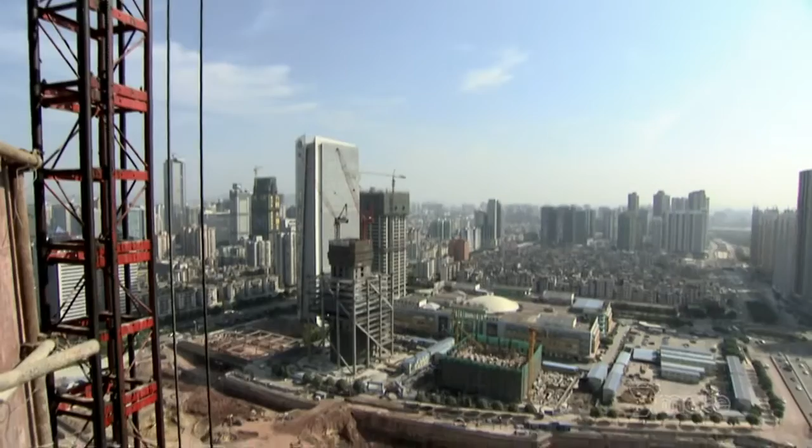Dozens of buildings are going up in Guangzhou's new central business district, but none like the Pearl River Tower. When complete, it will stand 71 stories high, among the world's tallest buildings. It will use 60% less energy than a normal building its size, and it will harvest sun and wind to make energy of its own.

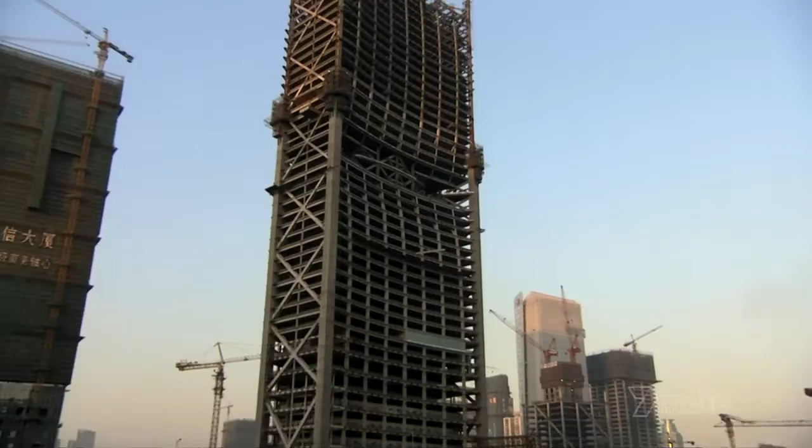Nature is both ally and enemy here. Typhoons pound southern China each summer like clockwork. A major fault line for earthquakes runs near Guangzhou itself. Engineers have to erect a building that not only harnesses the forces of nature, but withstands them. Right now, 1,000 men are racing to keep construction on schedule.

Across the site, Chief Engineer Dr. Cui Xiaoxiang is turning a radical blueprint into a concrete reality. My pressure is enormous. Frankly, my hair turned white after I came here. My biggest worries in the job are about safety and quality.

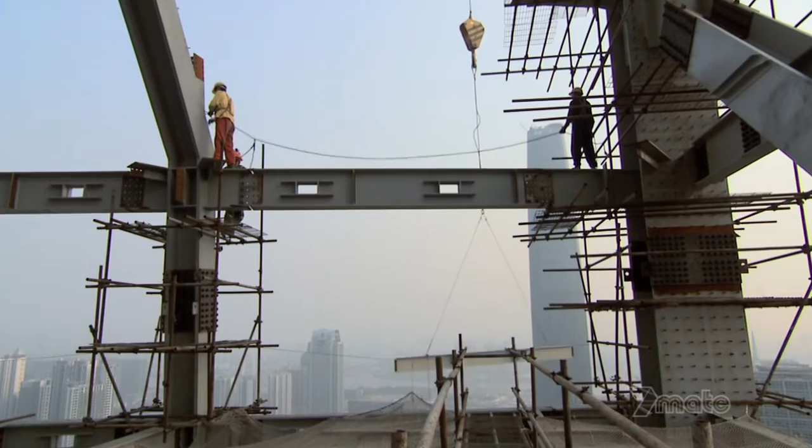On floor 45, they're installing 8-ton steel beams. They assemble the entire building using thousands of high-strength nuts and bolts instead of welds, the better to withstand earthquakes. The problem that comes with using only nuts and bolts is that we have to ensure high precision. With welding joints, you still have room for compensation. But when we use only nuts and bolts, we need to contain the deviation within a few millimeters. Otherwise, the whole steel structure will have huge errors.

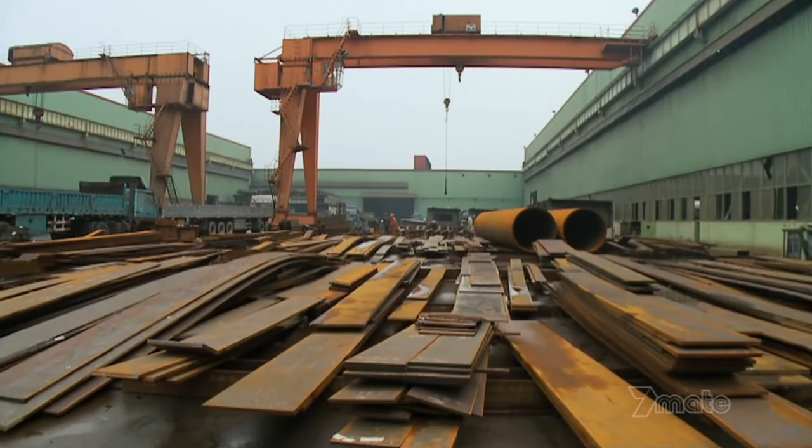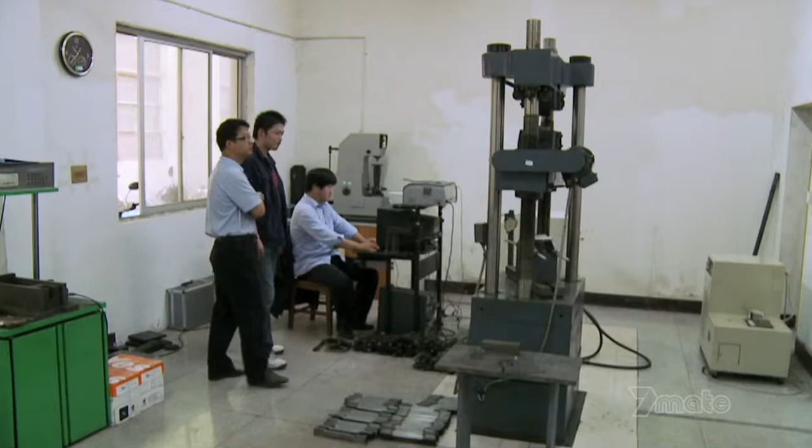Precision installation on site is mirrored by precision manufacture here, the Huning Steel Factory in Jiangsu province. The factory will produce over 18,000 steel pieces that make up the Pearl River Tower. Over 2 years, this factory will manufacture 29,000 tons of steel, enough to build almost 3 Eiffel Towers. Before they mass produce the parts, they stress each prototype to breaking point. A computer records the force applied and the relative strength of the steel.

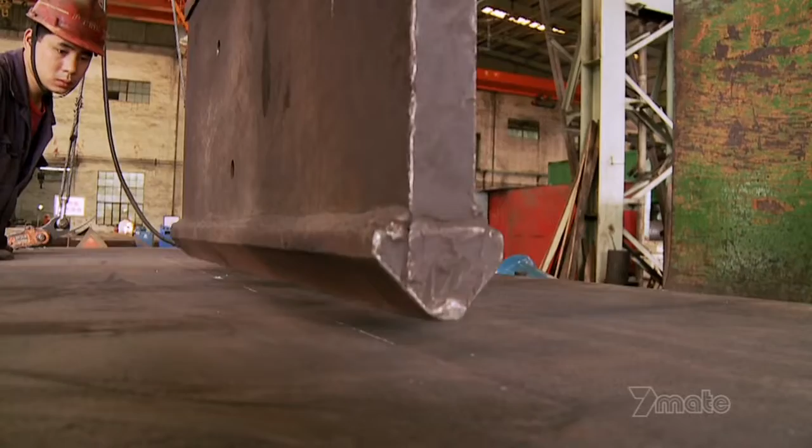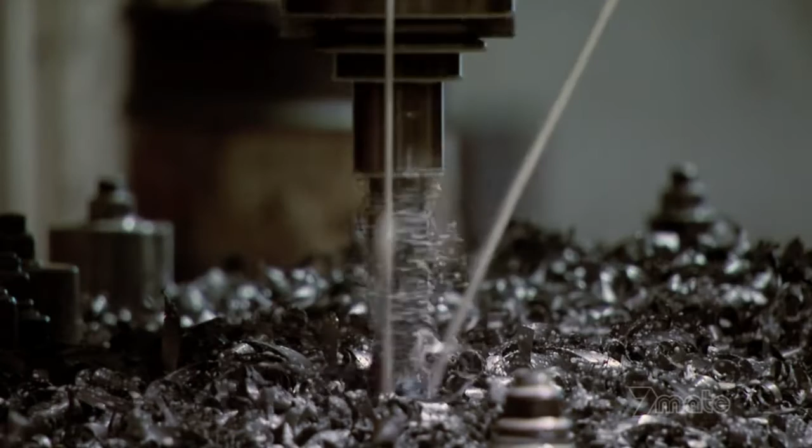All the steel must be perfectly flattened before they can start making components. They curve large beams by applying precise amounts of pressure at specific points along the length of the beam. They check every weld for defects using ultrasound. In total, they will drill 820,000 bolt holes to complete the structure of this tower. This machine can drill holes in 5 connection plates simultaneously, while maintaining accuracy in every plate. Some of the faceplates have more than 650 separate bolt holes.

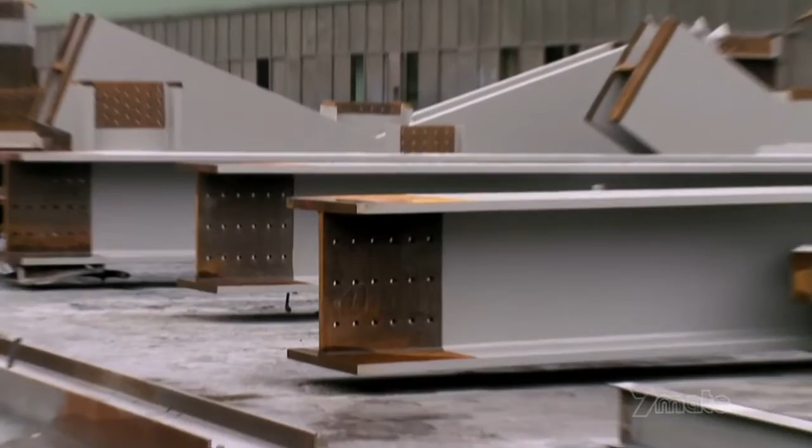The factory prefabricates key structures for the tower to avoid setbacks on site. Because pre-assembly can reveal the quality and precision of each part. If everything matches, then we ship to site. If not, we correct the errors at the factory to make sure everything goes smoothly on site.

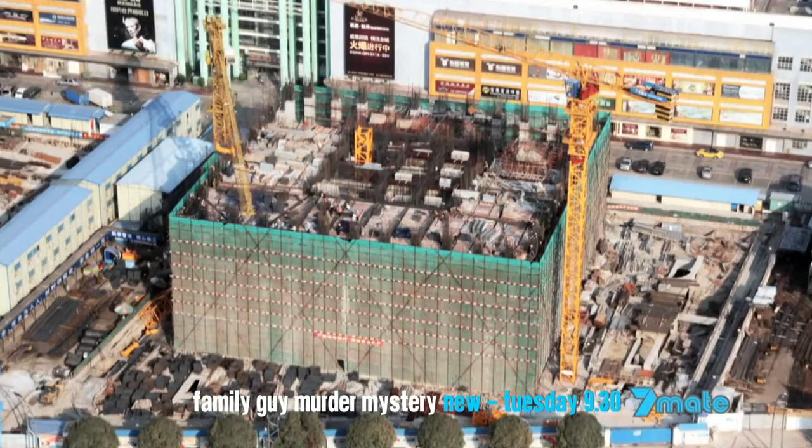Today, the words construction and China go hand in hand. Each year, the nation adds 2 billion square meters of construction, half of the world's new buildings. But this client wants a building that stands out from the rest. In summer 2005, they issue a competition brief to the world's leading architecture firms. Architect Adrian Smith has created such icons as the Jinmao Tower in Shanghai, once the tallest building in China, and the Burj Khalifa in Dubai, now the tallest building in the world. So what do you do for an encore?

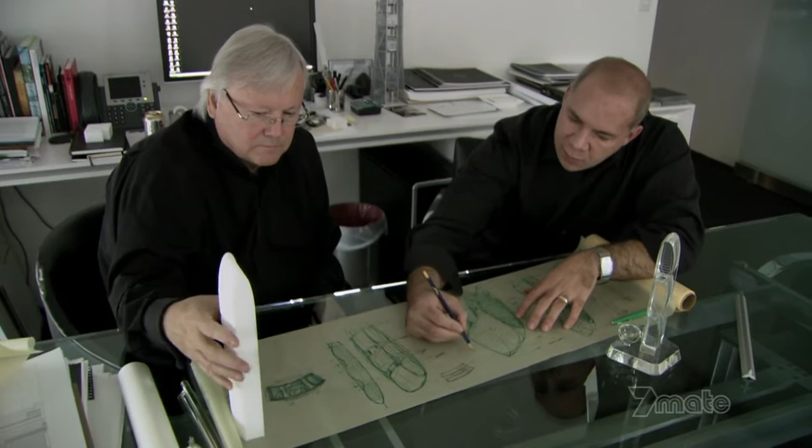When I first started reading the brief, and they talked about a building for the future, and they talked about a building that harmonizes with the environment, I thought that here is a client who we could propose a zero-energy building to. A super tall building that produces as much energy as it consumes. No one's ever built such a building. It's a radical design, based on a concept you don't usually associate with architecture: high performance.

Adrian Smith and colleague Gordon Gill have been eagerly awaiting an opportunity to put their theories on high-performance building into practice. Using aerodynamics and looking at the design of automobiles or the design of jets really helps you to understand how things perform at very high levels. It's really designed to perform like an athlete is shaped, his muscles are shaped for performance. We're going to try and funnel that wind through a port or a fuselage of some kind, and maybe we can mold the body like a jet, like a fuselage in a jet, or a car, like a Ferrari.

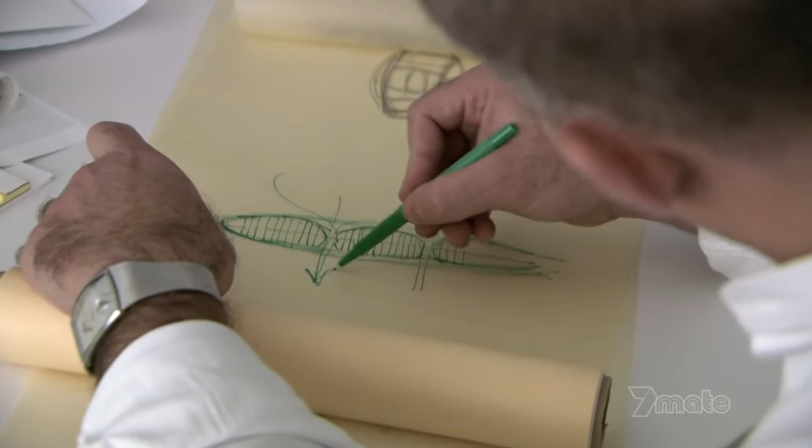My instinct was to, almost like a catcher's mitt, you know, just to catch the wind and see if we could use it to our greatest advantage. Just 1 week later, Gordon draws what will become the most energy-efficient super tall building in the world. I knew that there was something here that was different. I knew it, and it just poured out, and it was great. It was a great morning, and I'll never forget it.

He sketches the future, a building that curves like a sail in the wind. 4 holes will house integrated wind turbines to generate power. A unique double skin of high-tech glass covers the whole building, with inbuilt solar panels to generate even more power. And when I showed the final one to Adrian, I think he said, it looks like a car seat, and I said, yeah, it kind of does.

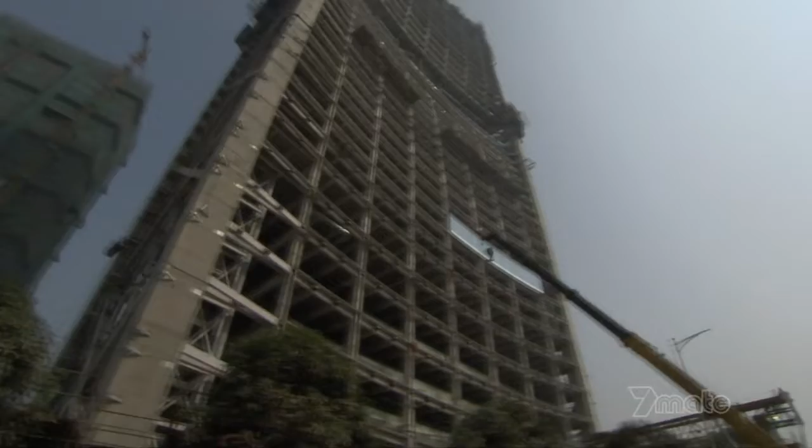The client in China loves the concept. The thing that grabbed me the most was the zero energy idea. It's the key that gets them the contract. 4 years on, the radical design is becoming reality. Engineer Roger Frechette flies in for regular visits to check progress.

The project got off to a rather slow start, but the further above ground the building grows, the faster the speed of construction. And I think the more they learn about the building, the faster things go. And right now they're adding 1 floor every 3 or 4 days.

Now this is very exciting. You can begin to see the installation of the steel that is curving back towards the building. And this is really the beginning of the bottom of that upper row of wind turbine openings. So you can start to see the shape of the building coming together. What you don't see is what it took to get this far.

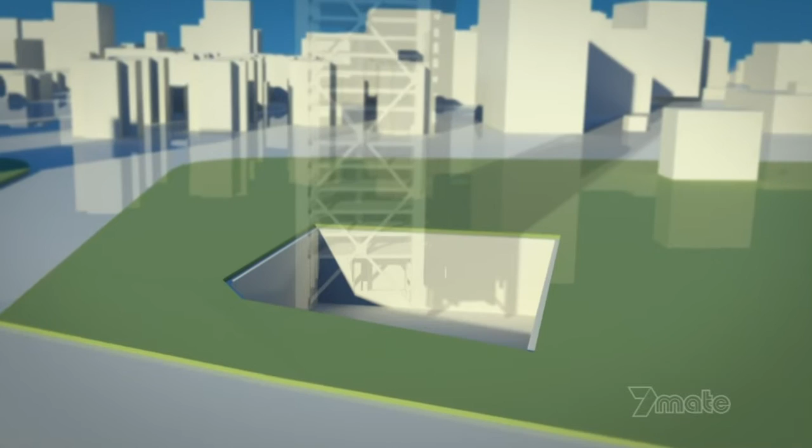Beneath is a vast basement with a footprint roughly 3 times larger than the one on the surface. And at 30 meters deep, one of the deepest basements in China, able to house 800 vehicles. We faced a lot of difficulties in the construction of the basement. Just 10 meters down, they hit bedrock.

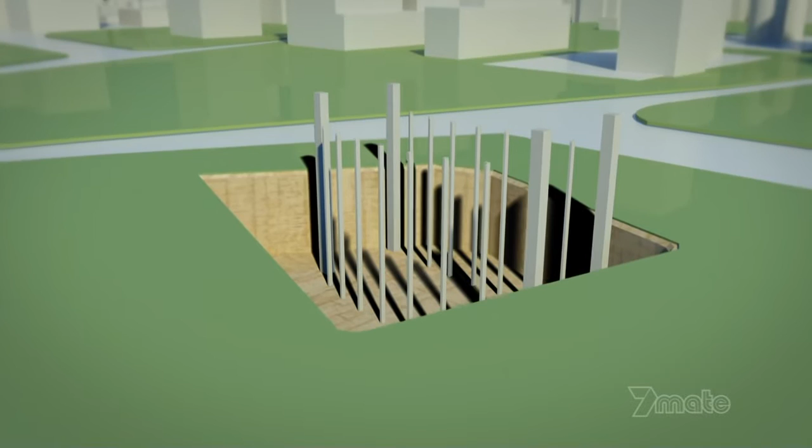They use explosives and pneumatic drills to hollow out the basement in stages, removing enough rock and earth to fill nearly 100 Olympic swimming pools. To support the tower, they set 4 steel mega columns with smaller columns in between, all sunk 30 meters below ground. Inside this steel skeleton rises the concrete core, the spearhead of the whole construction.

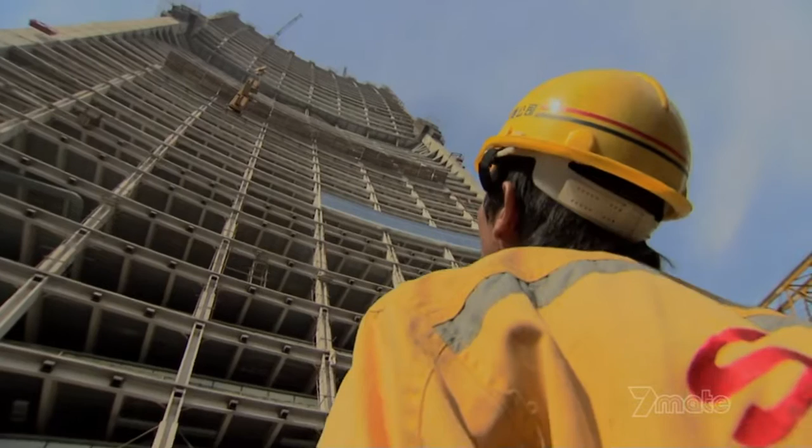The outer steel skeleton is complete to floor 46, and the concrete core has just reached floor 53. On top of the core, they're installing the beams that make up the core wall. This corner beam is headed for the work platform on floor 53. 230 meters above the ground, the crane driver is totally reliant on instructions from his teammates on the work platform below.

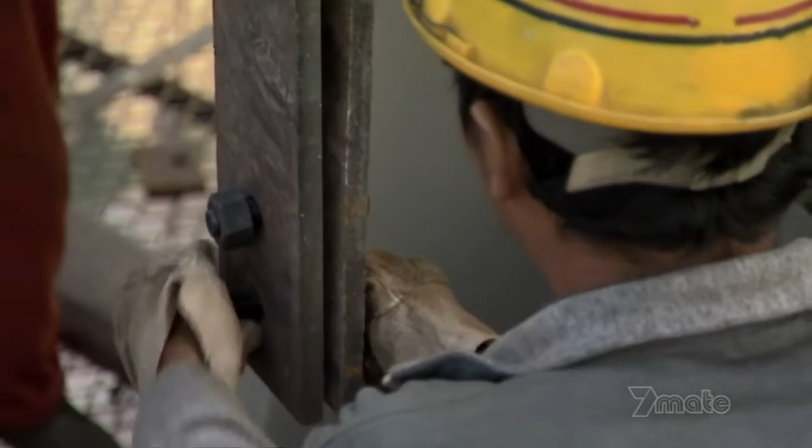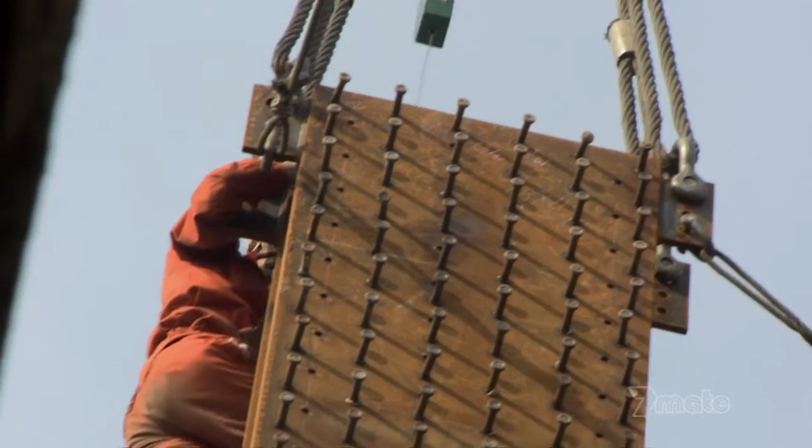With careful coordination, they guide this monolith into place. The crane holds the beam steady while workers position it within a tolerance of just 2 millimeters. A survey team calibrates the final adjustments. Once it's set, somebody has to release the beam from the crane. It's not a job for the faint-hearted. But this old hand even has time for a break at the top.

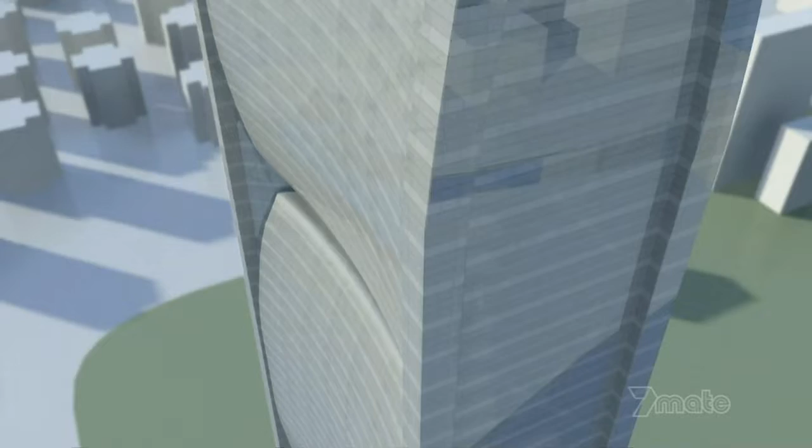Positioning steel on Pearl River makes conventional high-rise work look like a cakewalk. The reason is all those gorgeous curves. The multiple curves require us to think of the building's surface in 3D terms, instead of as a flat surface, like most conventional buildings. They use a complex system known as double-layer surveying that requires many more points to position each piece.

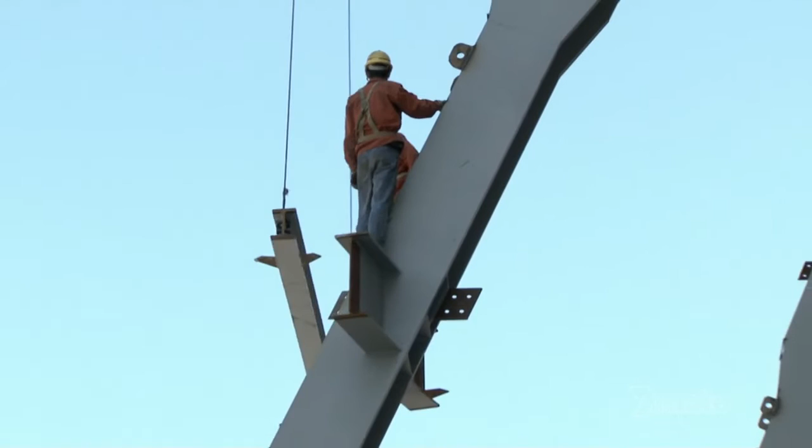First, they set up survey points high up on neighboring buildings. Then they establish another set of points on the tower's perimeter and on the edges of the core, so they can measure the exact height of every piece they install. The double-layer system is rarely used on conventional buildings, but engineers here can't live without it. But positioning the steel is only the first challenge. The next, getting concrete up to the steel without using scaffolding.

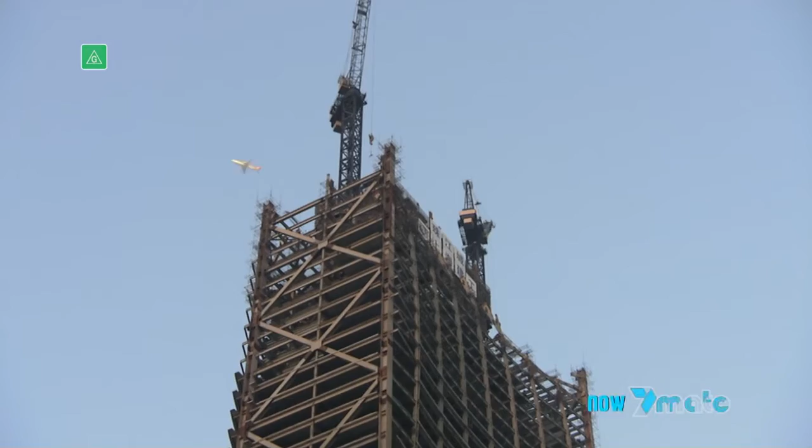On the Pearl River Tower, 2 shifts are working 10 hours a day to construct the mega columns. Work moves twice as fast here, thanks to a clever device known as the hydraulic climbing frame. There's a climbing frame attached to each of the 4 mega columns. This frame allows concrete to be poured for each mega column without the need for scaffolding from the ground up. Guangzhou Tsai is in charge of the climbing frame, which is patented by the Shanghai Construction Group.

Now we use the climbing frame as the scaffold, moving upwards all the way. It's very advanced. The climbing frame consists of a vertical track, a mold to hold the concrete, and a work platform on top. The frame moves up with the mega columns as the construction climbs higher.

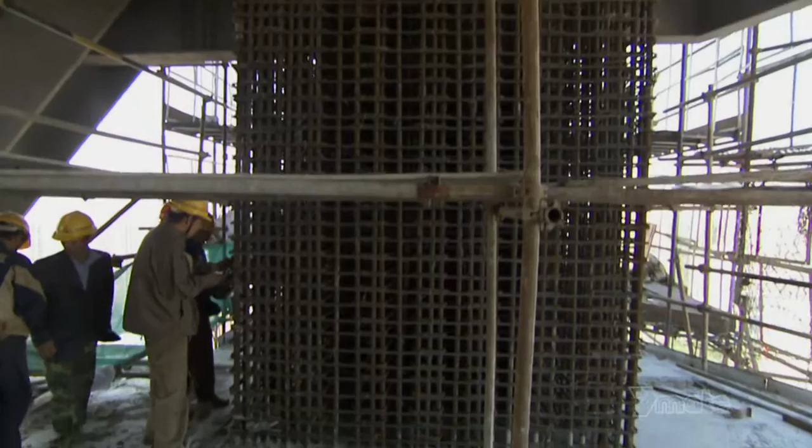On floor 26, they've just installed reinforcing rods around the steel core of the mega column prior to pouring the concrete. Once all gaps are corrected, the mold begins moving up from the floor below. Using this technology with a one-time investment, we can simplify the operation, save time, and reduce the workload on the crane. It takes 2 hours to elevate the mold from floor 25 to floor 26. Then the team fixes temporary steel beams to reinforce the mold before they pour the concrete.

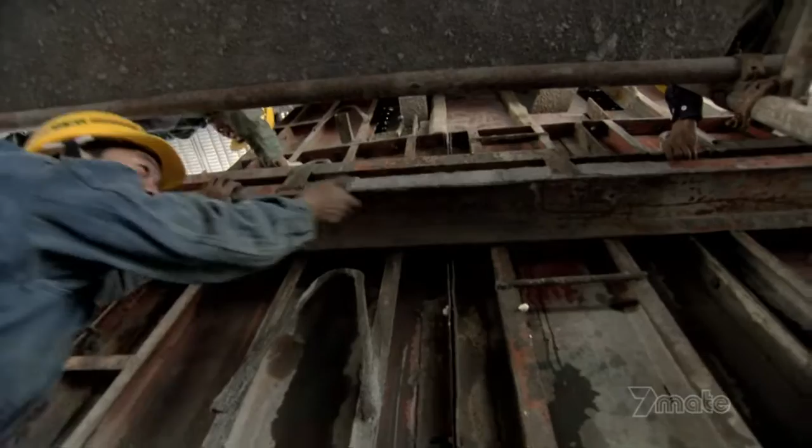Engineer Zhang Sung inspects each stage. We normally finish one level every 3 days. If we didn't use the hydraulic climbing frame, we'd need 6 days for each level. But now they face another towering challenge: getting concrete from ground level to 100 meters high.

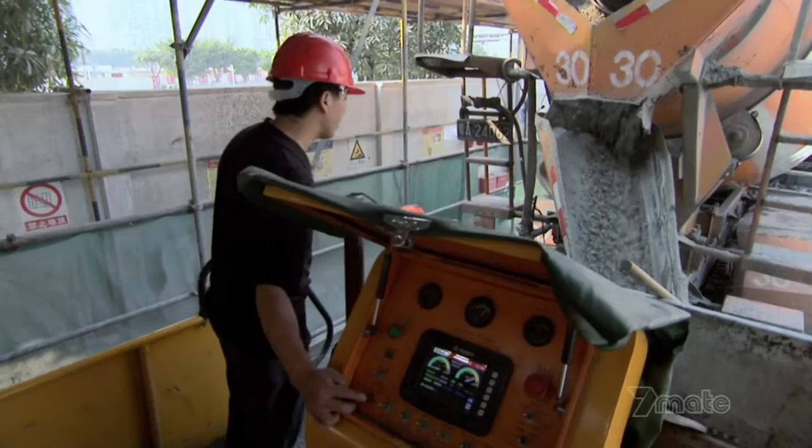This state-of-the-art Sany concrete pump shoots the concrete up to floor 27 at the rate of 30 cubic meters per hour, enough to fill a shipping container. Like arteries in a body, a network of pipes connects every floor in the building. From floor 27, they fill the mold on floor 26. When the concrete dries, the cycle begins all over again. 26 floors done, another 45 to go.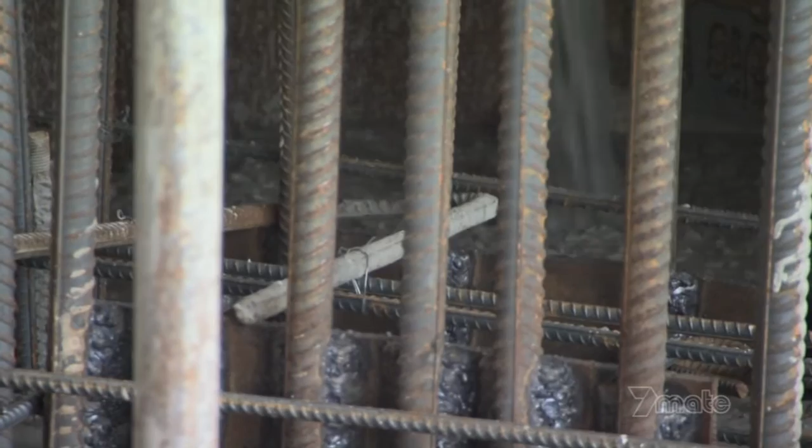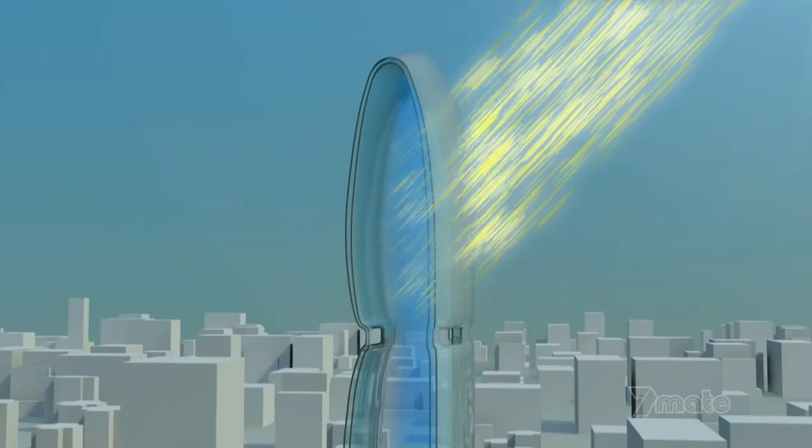The high-performing Pearl River Tower will use 60% less energy than a conventional building its size. A key high-performance feature is the double-skin glass facade. The way to think about this is like a sponge. The building will have a breathable skin. It will use its envelope to regulate not only how much light comes in the building, but the temperature and the amount of radiation that is allowed to penetrate into the building.

The Pearl River Tower will boast the largest double-wall facade in the world. Designing it poses a huge challenge for designers at Skidmore's and local architects at the Guangzhou Design Institute. The Pearl River Tower is the baby of senior architect Huang Huijing. In the design phase, we had a lot of questions. Like, will the temperature be a problem for the double-skin facade? Such facades work. Europe has used them for years. But no one has ever used this technology in a hot and humid environment like southern China.

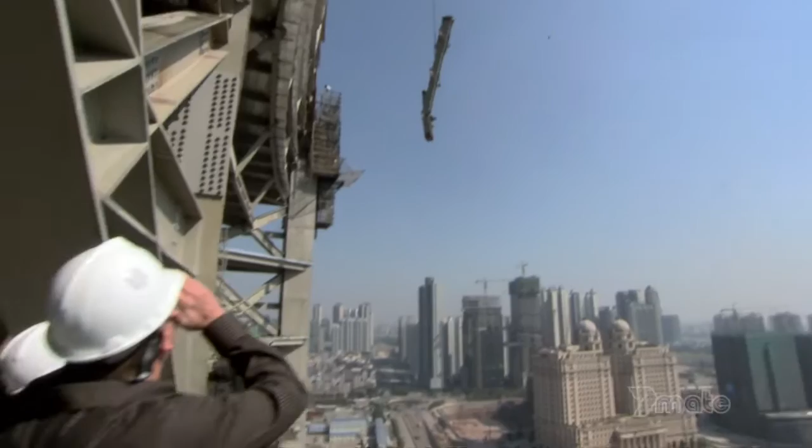The next challenge, how to keep people cool but save on energy. Most buildings use air to air condition people. Large quantities of cooler air come in and they come in contact with the human body and make you feel cooler. This building does not do that. Instead, engineers control the temperature by running chilled water through metal ceiling panels, a technology called chilled radiant ceilings. So the entire ceiling system in the building becomes a cold radiator. So when people walk into a room, the heat from their warm bodies exchanges with the cool of the ceilings, keeping them comfortable.

But the solution creates its own problem in hot and humid Guangzhou. Well, the main danger is that you get water dripping all over the place. I know, it's like a rain. If you have humid air coming into the building, that humidity would collect on the ceilings and would condense and start dripping all over the offices.

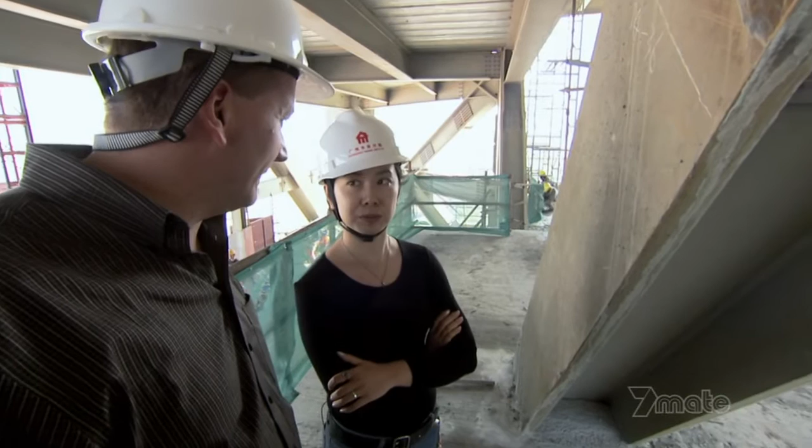Senior architect Huang Huijing tackles the solution. When using new technologies for the first time, relying on computer simulation is not enough. We need to do physical testing to be on the safe side. On the 9th floor, they mock up 3 rooms to test the ceiling and facade together.

Each room uses the same technologies, but from different manufacturers, so designers can choose the best products for the building. Engineer Roger Frechette and architect Huang Huijing check the results. That looks very good. Beautiful sunny day too. Yeah, we have tested one time and the result is very good. There's no water in the surface. No condensation at all. Well, that's fantastic.

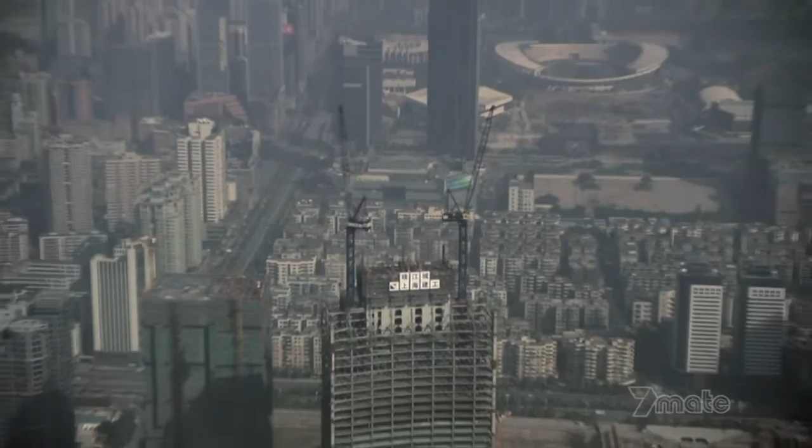The radiant ceilings will work so well, the building won't need a full-size energy-guzzling air conditioning system. Now, because we only need air for the ventilation, for the breathing purposes, the amount of air we need is significantly less, roughly 25% of what you would need for a typical building design. But another challenge looms, one that threatens the very health of the tower's occupants: contaminated air.

Normal air systems circulate the same air around a building up to 5 or 6 times. A lot of people get sick in a building from the air handling systems, from other people down the hall that may also be sick. In Guangzhou, the danger of airborne disease hits close to home. In 2002, this province was ground zero for a deadly pandemic known as SARS. Before the outbreak was contained, 1 victim in 10 died. But the Pearl River Tower uses air only once, creating a much healthier building. Having a healthy environment was something that was absolutely critical.

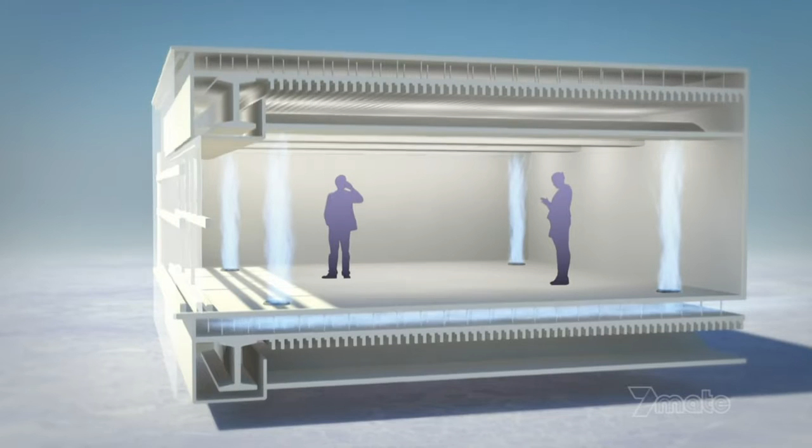Pearl River's fresh air is circulated through the building via vents in the floor. Because air is naturally buoyant, it rises through the breathing zone. Most buildings, air comes in from over your head, and you need fans to push the air down, and those fans pushing air down takes energy. So again, air coming into the floor saves energy. After implementing our solution, we estimate we'll make energy savings of 40% in this one area.

And this radical design yields another benefit. Because they'll need so little mechanical equipment, they'll need much less ducting between floors, a saving of 300 millimeters per floor. Throughout the building, they gain 5 extra floors, just over 9,000 square meters of rentable office space. So when you look at the economics of the building, that additional rent that can be collected goes a long way to help pay for whatever premium might be involved with doing this high-performance building. In fact, they estimate the Pearl River Tower will recoup its construction costs in just under 5 years.

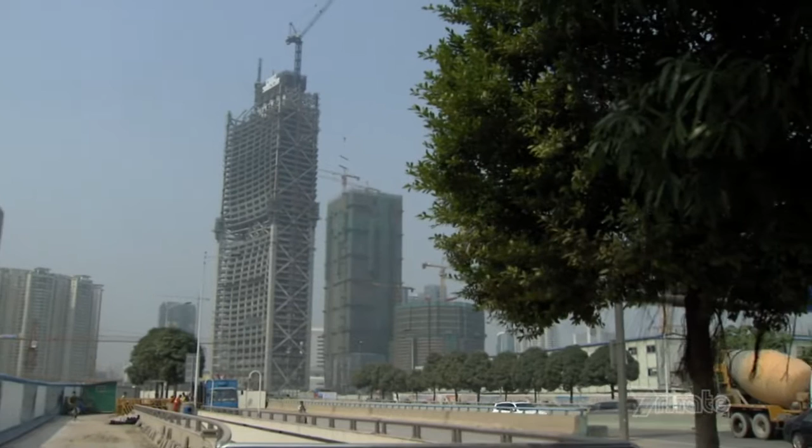Now we can say that sustainable buildings do not necessarily have to cost more. And this is a very important point, I think, in terms of the understanding of sustainable buildings. So even if you are not interested in green or sustainability, but you are interested in money, you may think that this was the right way to go. Now it's time to put all that theory into practice. The devil, as always, is in the detail. Designers must nut out every element before manufacturing can begin.

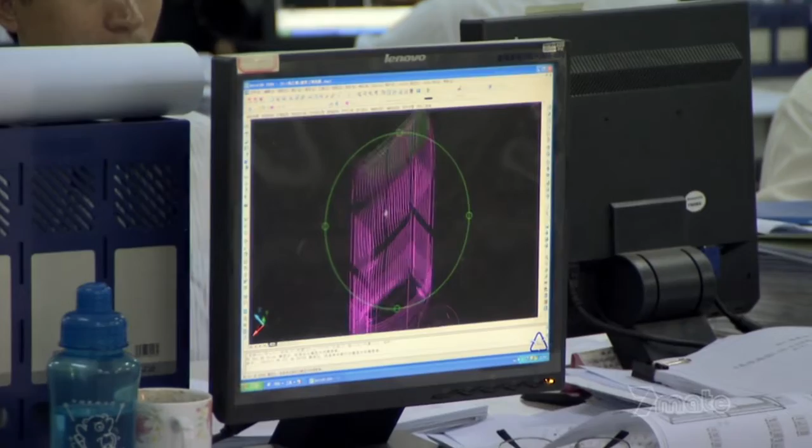The Zhenghe Curtain Wall Company faces the ordeal of designing, manufacturing and installing the largest double-skin curtain wall in the world. A team of 30 designers will work for 18 months on this one project. Using 3D computer software, they'll design every single feature that makes up the curtain wall. The complex curves on Pearl River test the team like never before. Because of its complex shape, there's a great variety of facade units. So the difficulty in manufacturing increases tenfold.

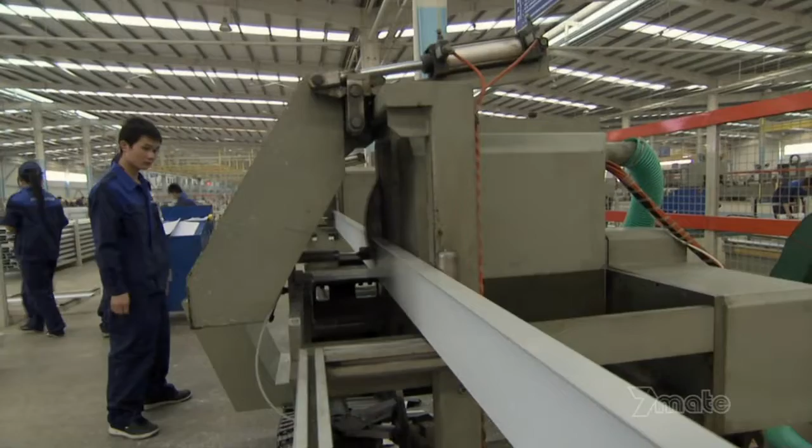The tower has 7 types of windows and 6,000 panels in total. On the factory floor, 3 production lines and 300 employees work solely on Pearl River. 1,900 tons of aluminium will go into making the window frames for the Pearl River Tower. This will be the largest window curtain of its kind. The panels are some of the biggest ever seen. The largest, at 24 square meters, is more than 3 times the size of a panel on a conventional high-rise. In all, Pearl River will be cloaked in 80,000 square meters of low-E glass, enough to cover 10 soccer fields.

But all that glass opens a window for trouble. Water, one of any building's worst enemies. Southern China gets up to 12 typhoons each year. April brings the monsoon season to Guangdong province. For half the year, more than 150 millimeters of rain falls on Guangzhou every month. We have to ensure that the curved surface is watertight, both inside and out. With its reputation at stake, Zhonghe undertakes its own testing of the window curtain at the Canton Quality Control Station in Guangzhou City.

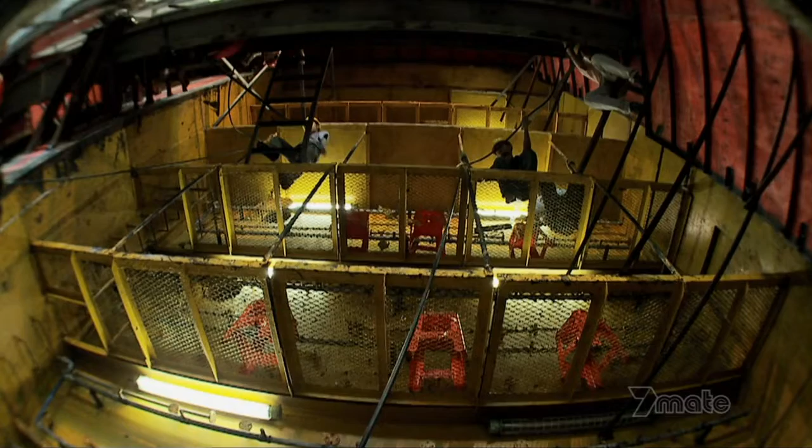This giant section of window curtain will endure more intense wind and rain over the next 2 days than the building might expect in its entire lifetime. Architect Russell Gilchrist of Skidmore's and local architect Huang Huijing will observe the testing firsthand. In the wind test, pressure sensors placed inside the facade will measure the distortion of the glass. A large pump inside the glass cavity simulates high winds by sucking out air, causing a buildup of negative pressure. The facade is battered by winds 1.5 times higher than the worst winds ever recorded in Guangzhou.

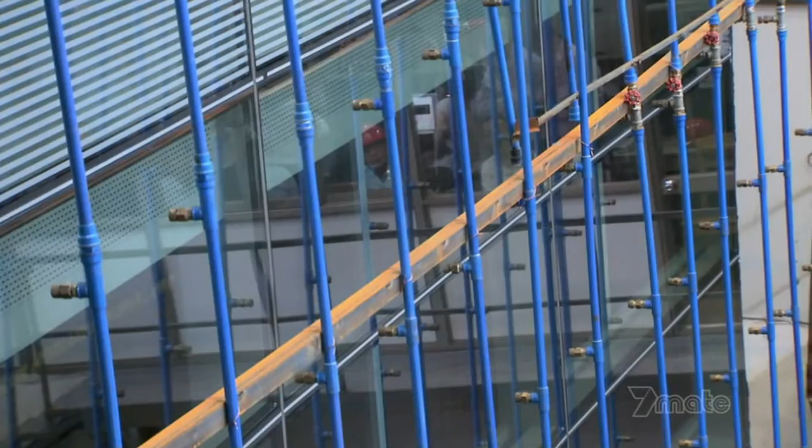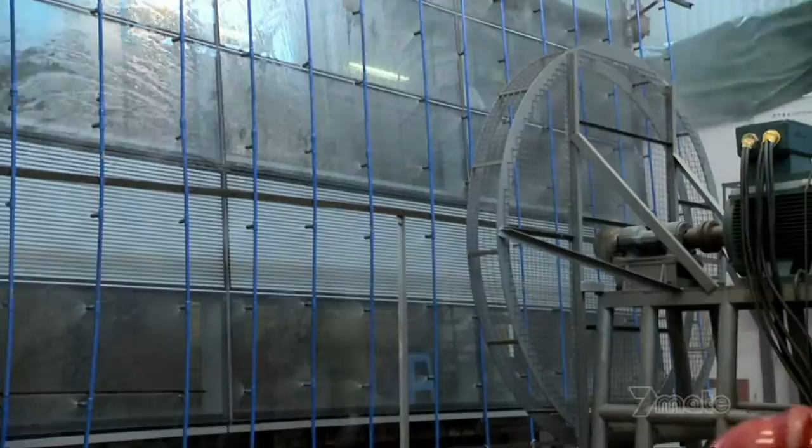Wind pressure can open gaps for water. So does the glass remain watertight? Turn on the typhoon. All facade projects in this country are subject to this kind of test. But since it's the first time a double facade is being used in this climate, this test is a first in our region. The interesting bit will be when they turn on the fan, because that will actually simulate horizontal wind and rain together. And that's where we test all the little gaskets to make sure that everything is watertight. The fan simulates winds of 144 kilometers per hour.

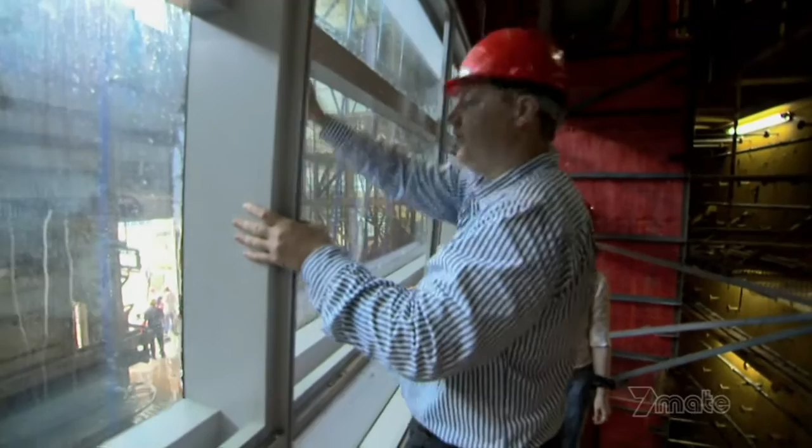Outside the facade, technicians check for damage on the rubber gaskets. And on the inside, Russell is delighted to find it's bone dry. I think we're good. That's a good test. If you get weather like this, that was a good test for it to pass.

Good thing rain can't get in, because the architects have set the tower directly into the prevailing winds to harness their power. Facing Pearl River directly into the wind is a bold move. Now, that's a little counterintuitive, because in a super tall building, you're trying to reduce the wind load on the building. And most people would tell you that it is unwise to face the broad face of the building directly into the wind, because the sail effect on that building is tremendous.

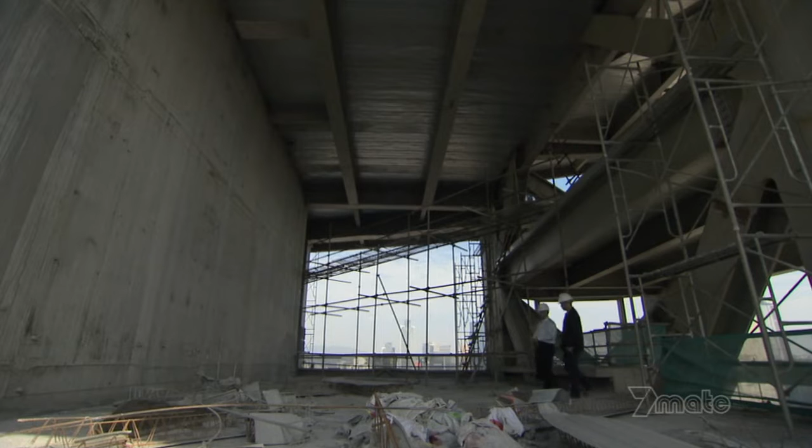The prevailing wind that comes from the south 10 months of the year will hit the tower head-on. The wind will funnel through 4 wind holes, located 1/3 and 2/3 of the way up the building. Dr. Sui and colleague Mr. Wang check out the bottom 2 wind holes. Do you feel the wind on this side? Once the glass facade is in place, the wind power will be greatly enhanced. There'll be an aerodynamic tunnel.

Wind tunnel testing undertaken in Canada reveals the wind speed through the holes will accelerate up to 2.5 times. I think most people would understand that if you narrow down a funnel, it's going to accelerate whatever you're putting through it, especially if it's symmetrically shaped. But I didn't know it was going to be 2.5 times. Their next challenge, finding wind turbines that are up to the job.

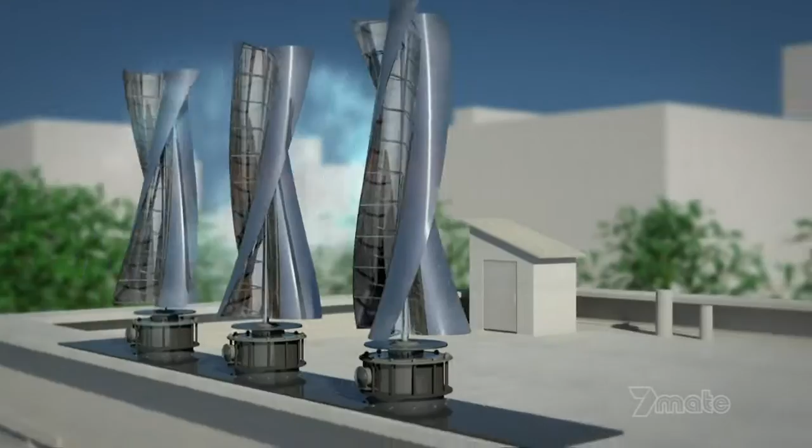Wind turbines like these are sprouting across the globe, but they can only cope with wind from a single direction and won't work in a turbulent cityscape where gusts of wind can come from all sides. The answer? Vertical turbines. They spin no matter the direction of the wind. Best of all, they cope with the turbulence common in the city. In other buildings, the wind turbines are commonly placed at the top or on an open platform. But in a radical move, Pearl River's turbines are the first in the world to be integrated within a building, with each of the 4 wind holes housing 1 vertical turbine.

It's revolutionary thinking, but it rattles the engineer's nerves. People are concerned that vibration will be a problem when the turbines start working here. The noise and vibration could do more than annoy the occupants. If the vibration mirrors the natural frequency of the floors, then the effect will be amplified, causing structural damage. The architects decide to commission a test at Hunan University, known for its elite engineering department. Engineers use a 1:150 scale model of the tower, complete with its own mini turbines. Inside the wind tunnel, they subject Pearl River to high winds, measuring wind pressure across the entire surface of the tower.

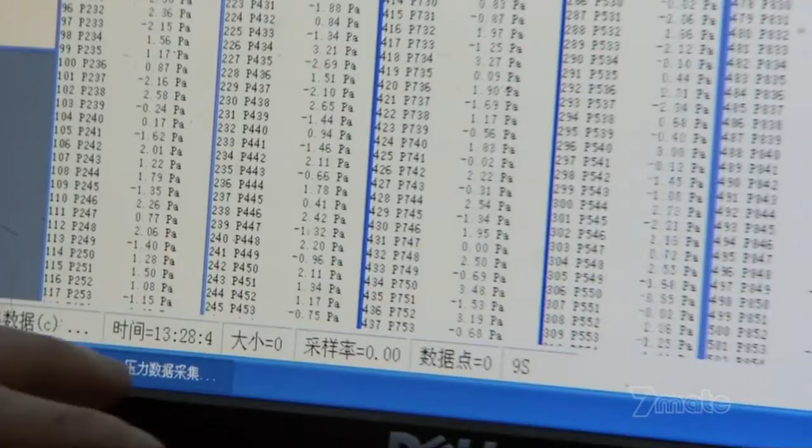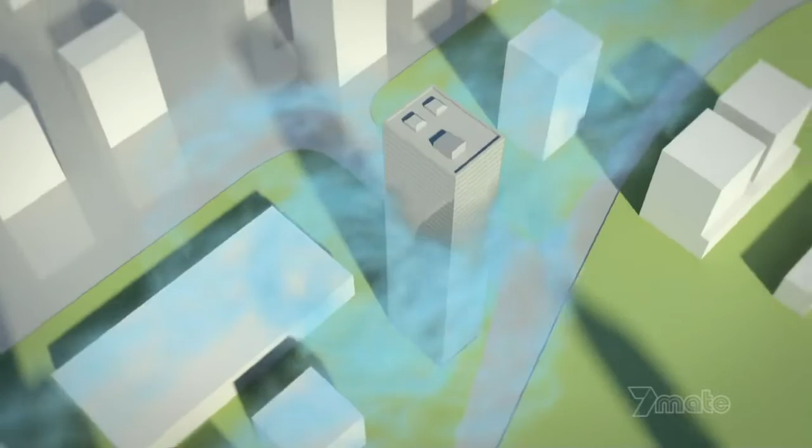Taking their wind pressure readings, they calculate the vibration of the wind turbines and compare it to the natural frequency of the floors. They conclude that the vibration of the turbines will not vibrate the surrounding floors. For the engineers, no vibration means good vibrations. Not only will the tower harness the wind to make energy, the wind holes will negate a potential hazard. Wind pushes hard on the side of any super tall structure, and in extreme weather, this same energy can cause vortices to develop on the opposite side of the building, pushing back the other way. These opposing forces can build up so much that the building begins to sway.

But on Pearl River, the wind holes act as pressure relief vents, reducing the pressure on the building by about 1/3. And in a super tall building, that's a tremendous amount of reduction because it helps to reduce the acceleration of the building and make the building more stable. By reducing pressure, the wind holes not only make the tower stronger, but there are cost savings too. So we need less steel and we need less concrete to help the building stand up, and that, of course, is a very sustainable thing to do.

It's also sustainable to harness the power of the sun. Photovoltaic panels will cover most of the east and west sides of the tower and the domed roof. Photovoltaic, or PV panels, take light energy from the sun and convert it directly into electricity, which feeds straight into the building's power grid.

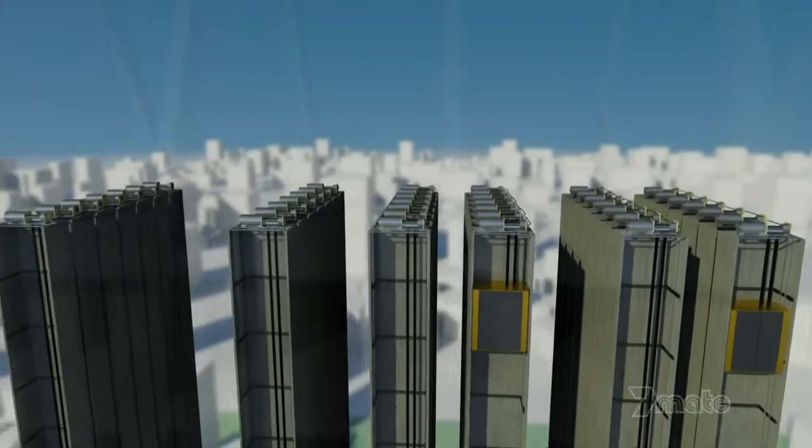And the building will also capture energy from within. 29 of the tower's 31 lifts are fitted with a new technology called the Regen Drive, which recycles up to 75% of a lift's power consumption. Regen captures energy whenever a full lift travels down or an empty lift travels up, feeding it back into the building's power grid.

On the 35th story, crews prepare to concrete the floor, and once again, innovation is saving time and money. On another super tall, this work could take 6 days, but here they do it in 3, thanks to the design of the floor plates. This kind of floor was first seen in Europe. We've taken the idea and reinvented

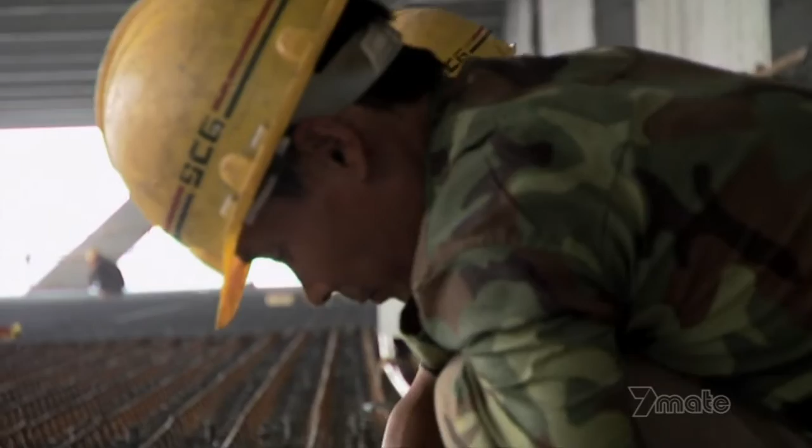it. Trusses are welded to the floor plates at the factory. The trusses reinforce the floor, so it needs far less reinforcing bar, or rebar. This saves a lot of man hours and materials. When we're wire lashing the rebar, we only have half the workload. So it makes the construction very fast and very efficient. And the cost isn't higher than a conventional floor.

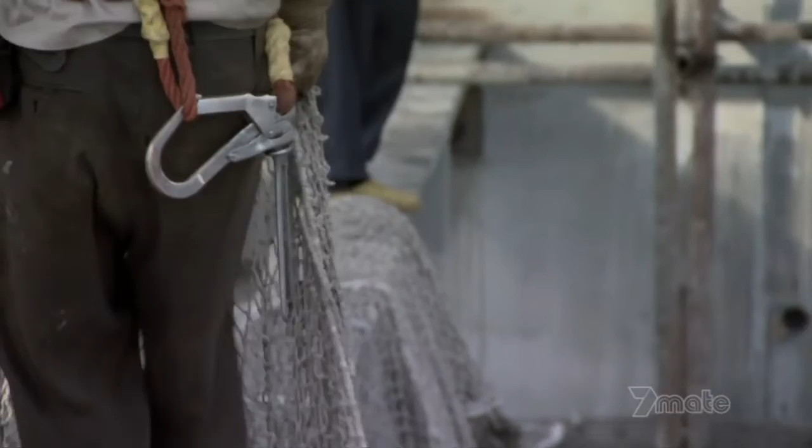As the tower approaches 200 meters, 2/3 of its height, the danger of falling objects increases. On floor 45, Xiang Shangchai's team lays out safety nets. Worldwide, construction workers are 3 times more likely to be killed than workers in other occupations. Somewhere in the world, 1 worker dies every 10 minutes. That's 60,000 each year. Sometimes small objects have fallen, but the safety net caught them. On this construction site, it's safety first. The life of the builders takes first place.

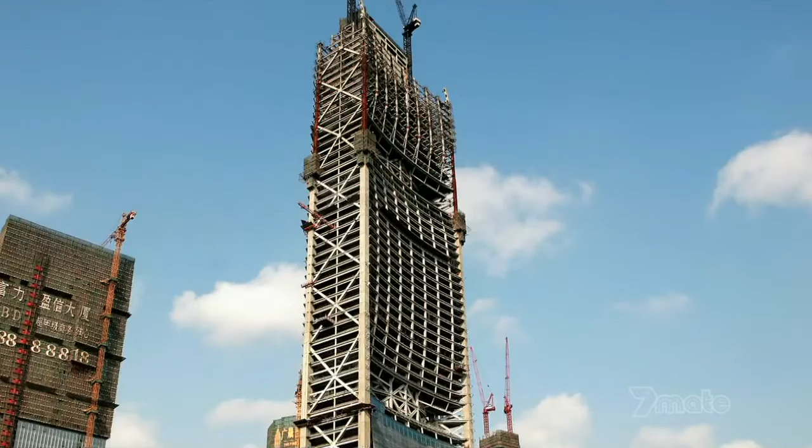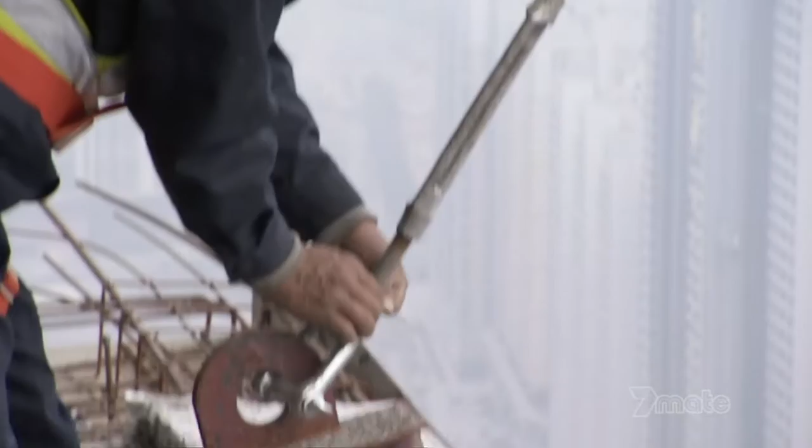6,000 glass panels make up the building's outer skin. Just getting each panel from the ground and into place is a mammoth task. On floor 53, a crack team from the Zhanghua Curtain Wall Company fits the temporary rails they'll use to suspend individual glass panels and move them into place up to 17 stories below. This rail system will enable them to install all the windows from floors 36 to 52. Each rail weighs a hefty 100 kilograms. A hoist above suspends the rail until it's bolted in place.

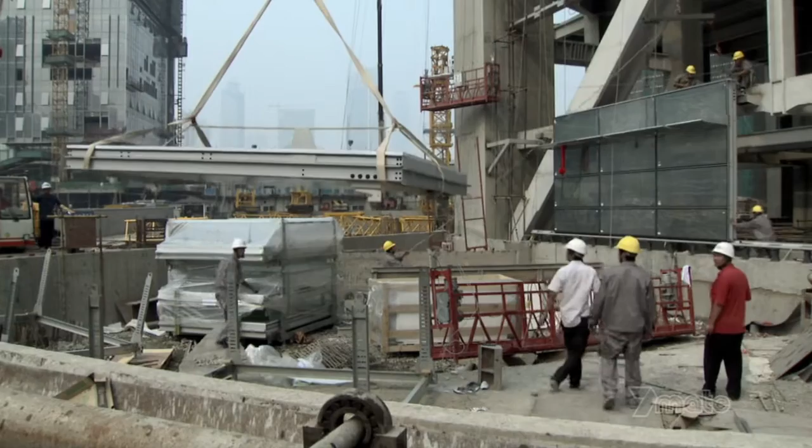Down below, the glass team prepares to hoist windows to floor 36. Once the panels reach their destination, an elaborate system of pulleys and rails moves them across to the other side of the building. The pressure is definitely here. The higher we go, the tougher it gets to install the facade. The challenge with this big building is that each panel is pretty big and pretty heavy. It's very difficult to move them.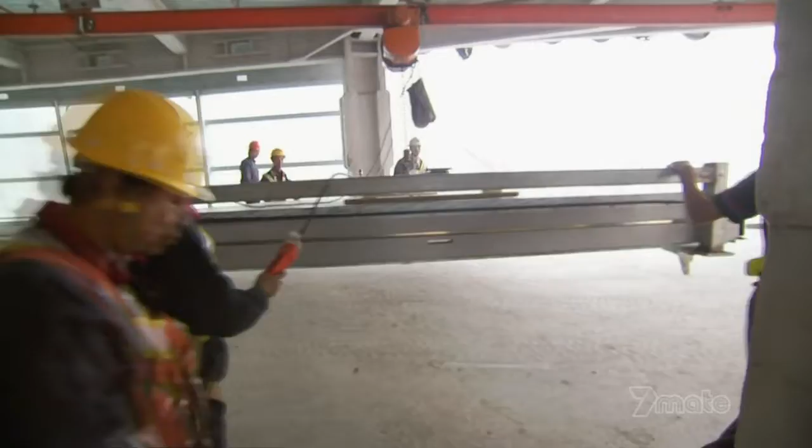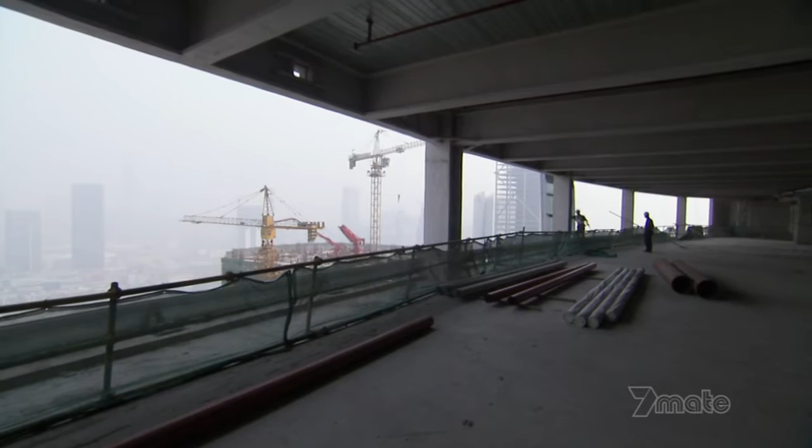With military precision, they lift each 400-kilogram panel to the open void, where it's attached via cable to the window rail above. At this level, wind heightens the challenge. Because we're quite high, the wind is stronger when we lift them. We have to prevent them from crashing. In a superb effort of coordination, workers on multiple levels guide the window along the side of the building.

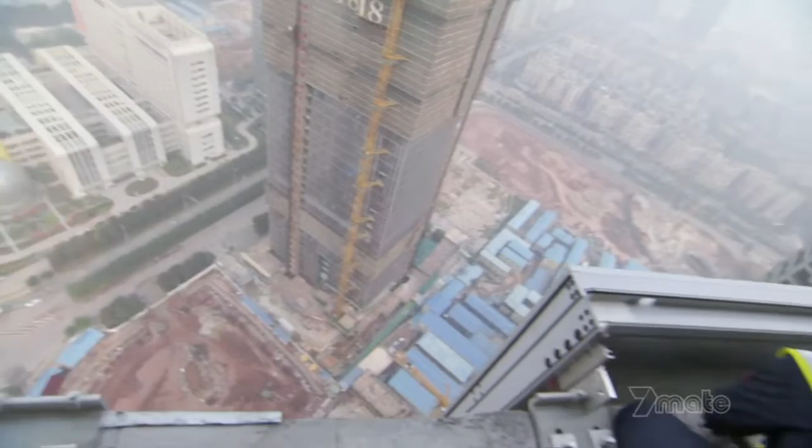Something that appears straight to the naked eye may not be. That's why we have to survey every panel we install. In a building with multiple curves, where everything is calculated in 3 dimensions, no window can deviate from the master plan by more than a fraction of a millimeter. Before securing the window, a team seals the frame, a simple but crucial step in this tropical environment. Any gaps and moisture will get in. On average, the team installs 40 window panels every day.

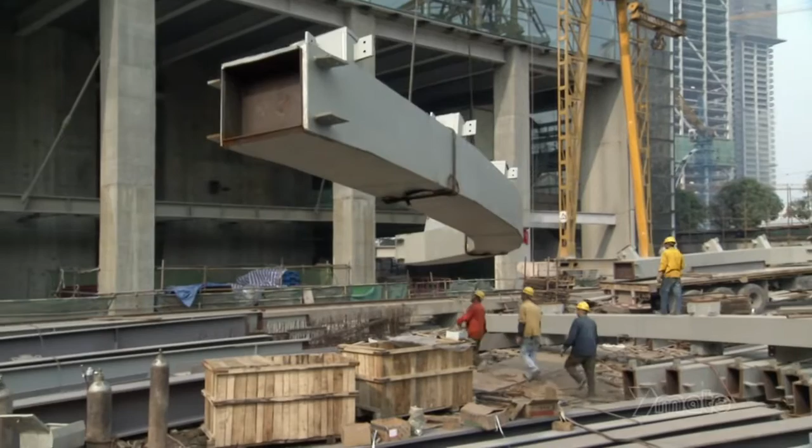The steel skeleton is all but complete. Now crews are assembling the last of the main steel structures. These pieces will make up one of 8 steel arches that form the domed roof, the crowning glory of the tower. Assembling this giant jigsaw puzzle takes patience. This arch stands 18 meters high and weighs well over 20 tons. Looking at this piece of steel behind me, it looks like it's probably about 20 tons, and they'll be lifting it up in the next day or so. I don't want to be standing right here when they do that. I'm going to be standing much further away.

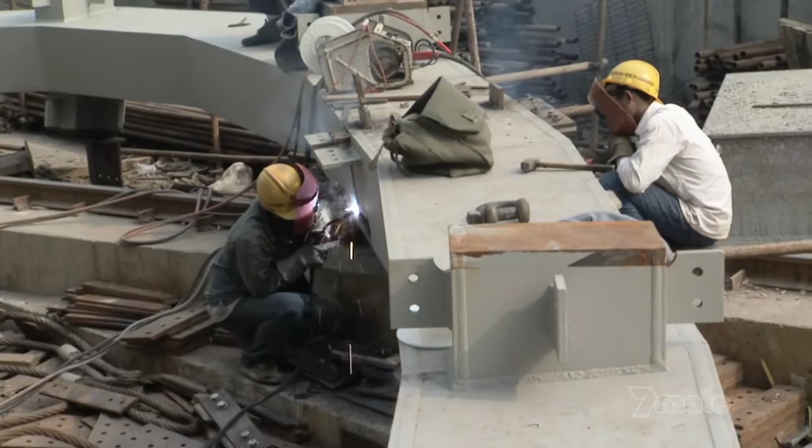In the race to complete the tower, the glass is being installed before the steel structure is complete. They've saved valuable time, but now this giant arch will pass perilously close to the building's fragile outer skin. The arches are some of the largest steel elements on the tower, and their installation signifies the beginning of the end. We've entered the final phase of building. For every builder, a time like this is an exciting one. Because after a long journey of hard work, it's a time of fruition and victory.

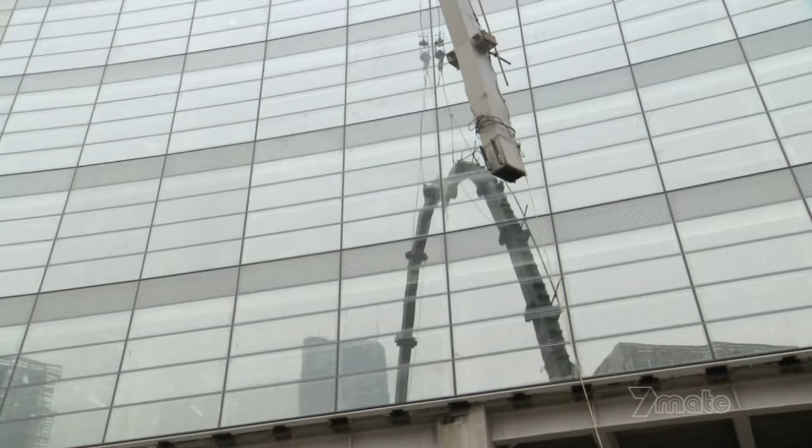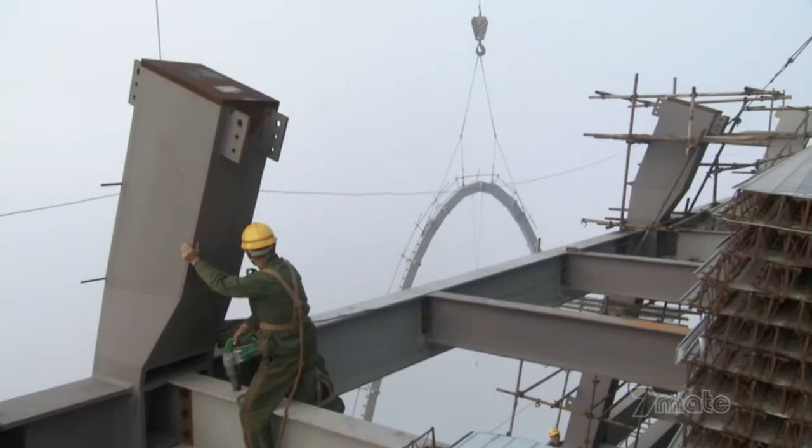Nature threatens to cancel the lift, but not because of the wind. Fog has engulfed the top floor. The crane driver is steering almost blind. Worse still, the work platform isn't ready. The floor team is behind schedule, leaving a hazardous work zone for the team that positions the arches. The fog closes in.

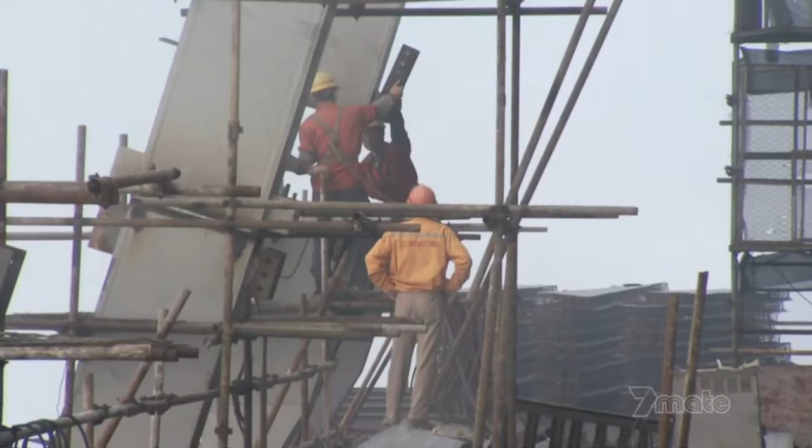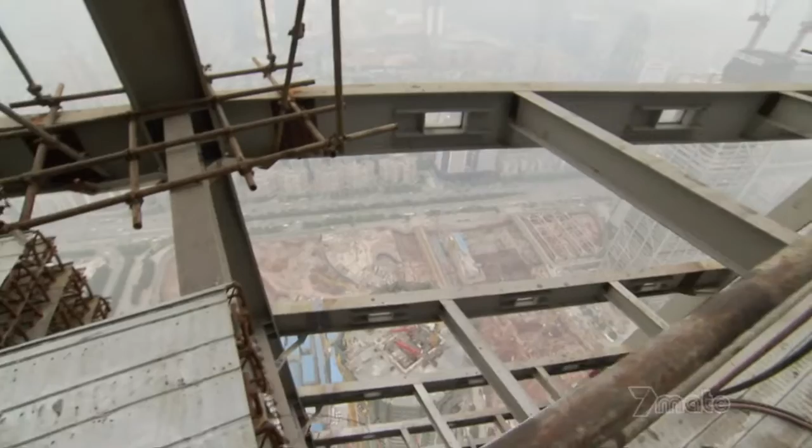Then, moments from aborting the lift, they manage to maneuver this 22-ton horseshoe deftly into place. Mission accomplished. From floor 68, Roger and Russell view the final phase. For both men, installing the arches caps a dream 5 years in the making.

The big arch, straight through the top, can you see it? Yep, I see it. That's just been bolted into place. To see it here today in concrete and steel, and having reached the top of the building, 309 meters, it really is satisfying to watch it come together and become a reality. Well, it is quite a thrill, architects and engineers seeing their work built. It's a very powerful image.

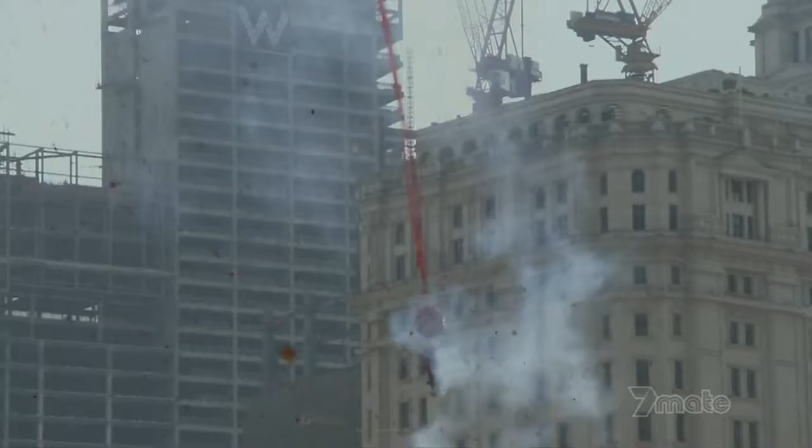2 weeks later, they celebrate their success. On closed-circuit television, they watch as the very last beam is lowered in place. But one ambitious component will never be installed. The designers aspired to make the Pearl River Tower a net zero energy building, one that produces as much energy as it uses. We set a very high mark at the very beginning of the project, net zero energy. This is the holy grail for mechanical engineers to have a building that contributes more than it consumes.

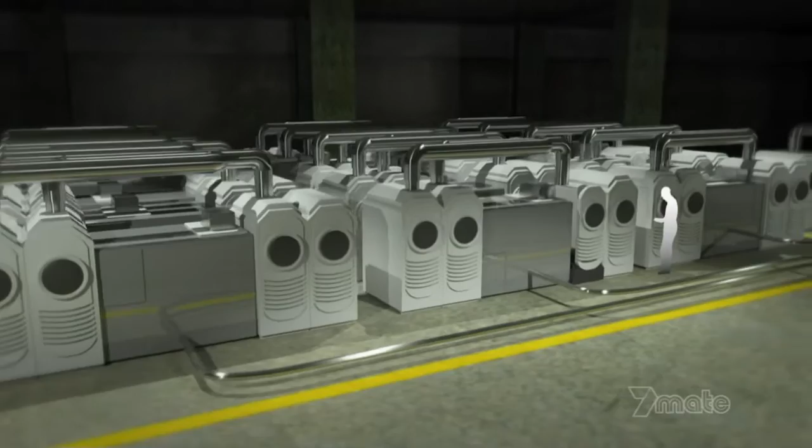The architects hoped to reach their goal by harnessing the sun and wind, but they needed a third source of power. Their blueprints called for a fleet of 50 micro-turbines in the basement. These gas-fueled turbines would provide 3 megawatts of energy to the building during the day, and at night they would sell excess power back to the local grid in a process known as net metering.

But the blueprints get snagged in red tape. The city of Guangzhou currently does not allow net metering of commercial buildings. Unable to sell power back to the grid, the designers can't justify the cost of the 50 microturbines. Out they go, along with the net zero dream.

There are certain things that won't allow Pearl to get to zero. But I think the true success of Pearl River Tower is the fact that it has opened this door and questioned why not. But we did take the first step. The first step that's going to encourage further improvement of energy-saving technology in the future. And what better place to take that step than China?

China has one of the fastest growing economies in the world, making it the second largest consumer of energy on the planet. It's the world's biggest producer of coal, which provides 75% of China's electricity. To keep up with demand, they add another coal-fired power plant every week. China has now surpassed the USA as the world's largest emitter of carbon dioxide.

But most of that carbon dioxide doesn't come from the usual suspects. A lot of people don't realize that buildings have more of a negative effect on the climate than automobiles or factories. In fact, the world's buildings consume up to 40% of all energy. The Pearl River Tower looks beyond fossil fuels towards a greener future. For those who built it, the experience has been life-changing. In my whole career, this project has given me the biggest pressure. I hope with a happy ending, my hair can turn black again.

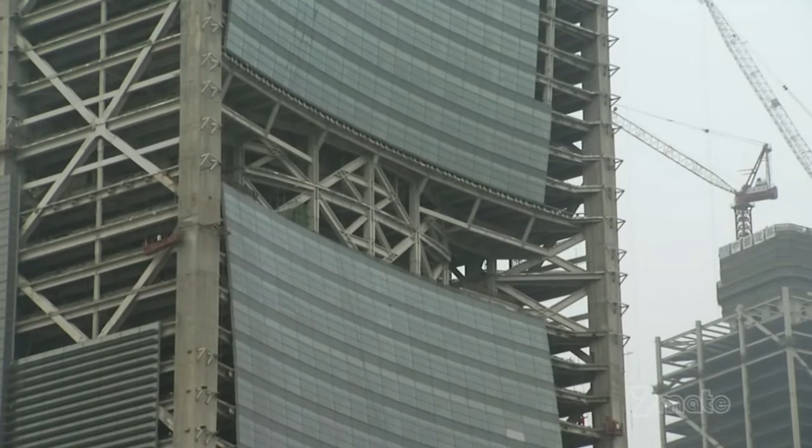When complete, the Pearl River Tower will be the most energy-efficient super-tall structure in the world and a benchmark for every designer to surpass. This will be the very first time that wind turbines have been integrated into the very body of a building. This will be the largest water-cooled building in the world. It will be the largest double-skin facade building in the world, and of course the most energy efficient.

When you do something pioneering, it's not necessarily about that particular moment in time being successful, but the beginning of an idea. And if someone else takes what we've done and improves on it, nothing would make me happier.

We need a building that can be tested and monitored so that we can see how it's performing from year to year. Pearl River will give us that tool. And 50 years from now, they'll look at that building and say, this started the measurement system, this started the way forward in high-performance buildings. The highest tribute to this tower of the future will come when it's a thing of the past.